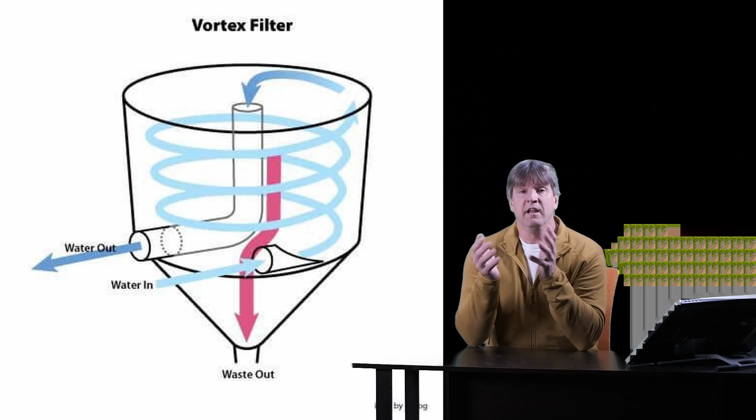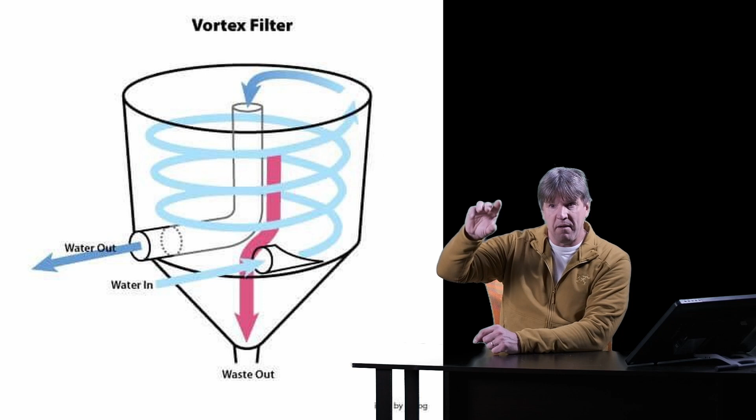So vortex filters basically in concept are very easy. It's basically a round cylindrical tank, okay, with a cone shape preferably on the bottom. And what happens is the water comes in a pipe from the side, okay, about midway up the tank, where the water can come in on the side of the tank and just circulate around like a big whirlpool, okay? As that water circulates around, round and around and around, all the solids will drain out of it to the bottom of the tank.

On the top of the tank, there will be an overflow pipe, which can lead out to, preferably, another filter tank. Whether a mechanical filter, biological filter, whatever we may have set up. We'll talk about all that. So again, concept really easy. Water comes in the side of this cylinder round tank, about midway in the water column. Okay, water comes in, circulates around the tank, solids settle out to the bottom, and then the clean water comes up to the top and overflows out the top pipe.

Okay. So, I first learned about these vortex filters probably almost 30 years ago when I built my first pond for myself. I was really into koi ponds. I was really into bottom drains, and I found out that these vortex filters work great with bottom drains. So I went through all kinds of crazy channels to try to find a vortex filter. Right? So keep in mind, 30 years ago, a lot of this pond industry stuff was all pretty new, and things weren't as readily available as they are today. But I did get my hands on a nice vortex filter.

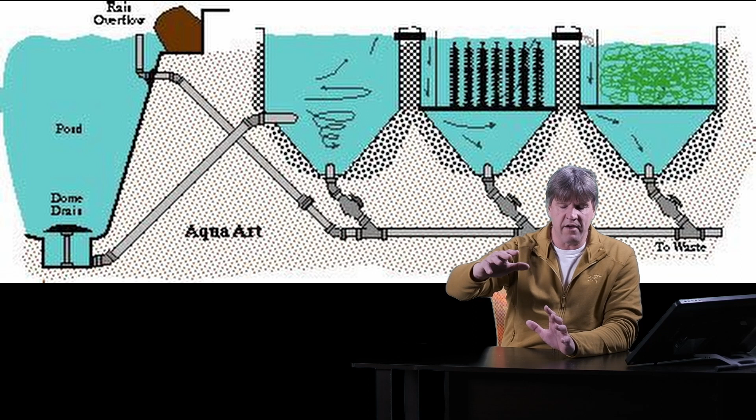Ideally, they should be set up in a bottom drain system, okay? You can set a pump to pump into them, okay? But if you're pumping into them, then your end result, your pipe out of the tank, whether this tank or your filter, whatever kind of filter comes after it, has to be just a gravity-fed pipe back to the pond. It's not going to be pumped back up to a waterfall or anywhere else like that.

So for that reason, gravity feed them in from a bottom drain directly into the side of that vortex tank, fill up the vortex tank, flow out of the vortex into the next chamber, out of that into the next chamber, 2, 3, 4, however many chambers you have, and then a pump pulls it out of the last chamber and pumps it back through UV lights, through a bead filter, through whatever you wish, back to your pond, waterfall, stream, whatever. Like this picture shows back here behind me.

Now, two things that I definitely recommend. One, to have a valve, whether a gate valve or a ball valve, in front of the vortex tank. So as your water comes from the bottom drain, we need a valve there before it gets into your vortex. Reason being, when we want to clean the vortex or clean any of the filter tanks, we need to be able to shut the water off, stop the water flow from the pond into that filter tank.

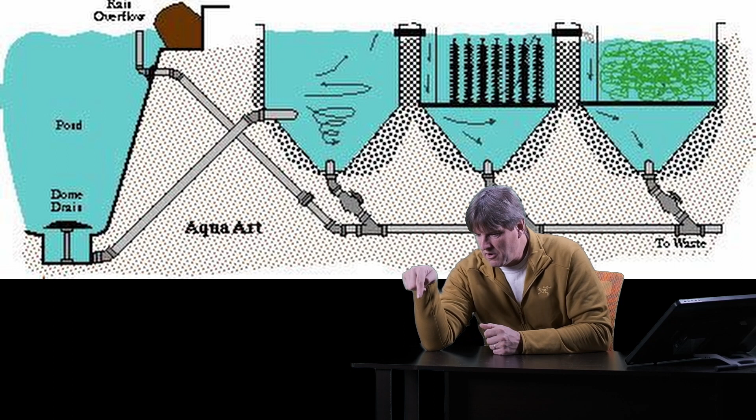However, great in concept, very difficult to achieve in the field. Simply because if we are putting these tanks in the ground, our ball valves are now 3 feet down underground. Okay, so we need to find a way to access that ball valve to be able to open and close it. And secondly, where is all that wastewater going to go if we're 3 feet underground?

All right, we have to be able to drain these tanks in such a way that the water out of the discharge pipe has a free flow out someplace to drain and get rid of all the garbage. Unless your property's on a hill where we can trench out and come down the hill, it's difficult to use these drains in the bottom of the tank.

Now, another option would be to use a sump pump inside: shut the valves off, close the water supply from the pond, put a sump pump in there and suck all the garbage out and suck out all the water. Yeah, that's an option too, okay? Of course, it's much easier if we can just open that valve and let all that water go right out and carry all that sludge and debris and sediment out with it. So that's something you have to figure out on your own, in your own pond, your own property, how we're going to do that.

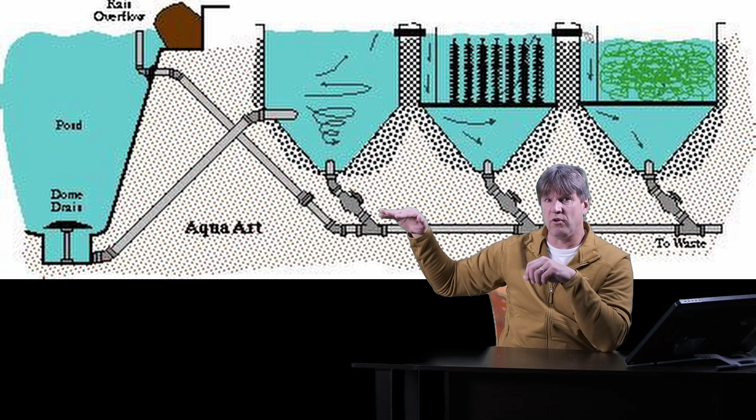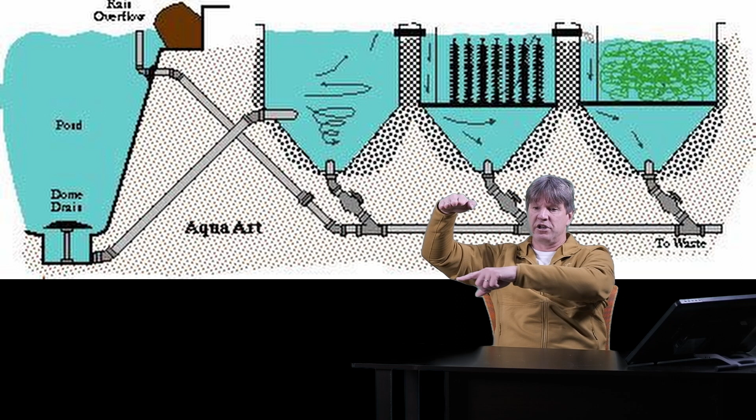Now, these filter tanks ideally need to be set up, especially if it's done with a bottom drain, so that the top of the vortex filter is a couple inches above the water level of your pond. Because you have the water level of your pond, you're going to have a bottom drain, you're going to have your 4-inch pipe, 3-inch pipe, whatever it's going to be. I would recommend 4-inch coming up into that tank, all right? And then that water is going to fill that tank up.

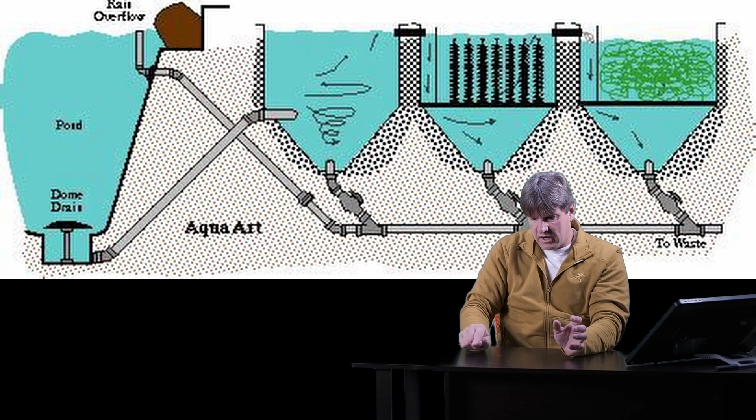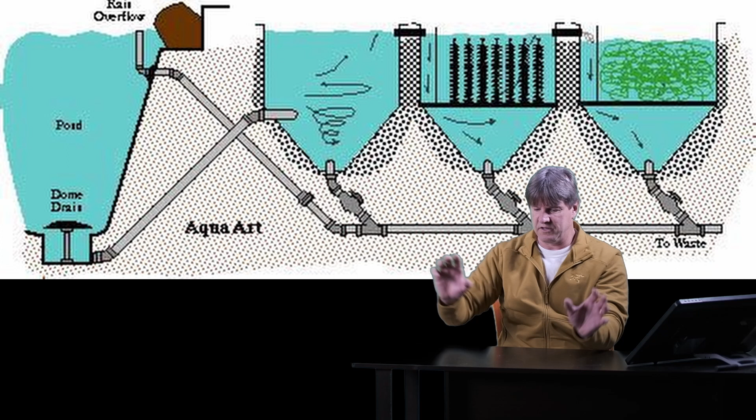So picture it as 2 cups of water with a straw connecting the 2 cups on the bottom, okay? 1 cup of water is your pond, 1 cup is the filter tank, and the straw is the bottom drain and the pipes connecting the 2, okay? If you pour water into your pond cup, the water's going to go into the other cup through the straw, and both cups are going to fill up at the same time, even and level, all right? So 1 cup is your filter tank, 1 cup is your pond.

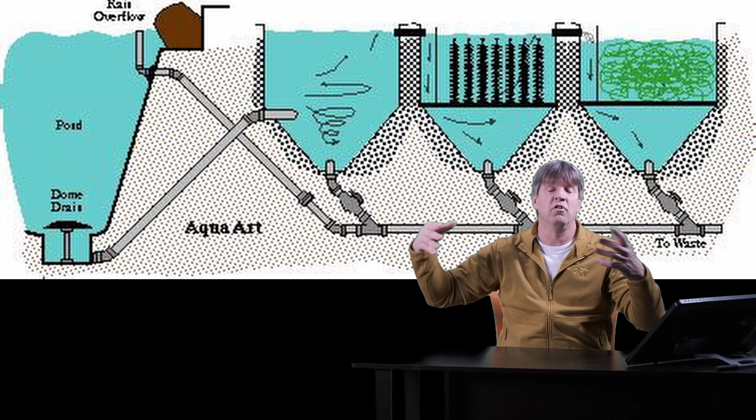We need to make sure that that filter tank is a little bit higher, all right? The top of that tank is just a couple inches higher than the water level in your pond, so it doesn't overflow. Now, here's the trick.

On the top of this filter tank, where we have this overflow pipe, the overflow pipe may be a couple inches from the top of the tank. We need to make sure that the water level in the pond covers that overflow pipe, but yet does not overflow the tank. That's key to setting up these filter tanks.

Reason being, if the water level in our pond should drop, if it should evaporate and drop, what's going to happen is your overflow pipe is here. When the pond's full, the water is going to be able to go through the pipe. If the water level in the pond drops, the water level in the tank is going to drop. If the water level in the tank drops, we don't have a full flow of water through that pipe.

So we may have the ability to bring in, I'm just going to throw a number out, 4,000 gallons an hour through our bottom drain into the vortex. But what's going out of that vortex is maybe 2,500 gallons an hour, because at the bottom where the pipe is coming in, we have a full flooded pipe coming in. Where it's going out, it's not a full flooded pipe. It's only maybe halfway flooded. So the water's just going through.

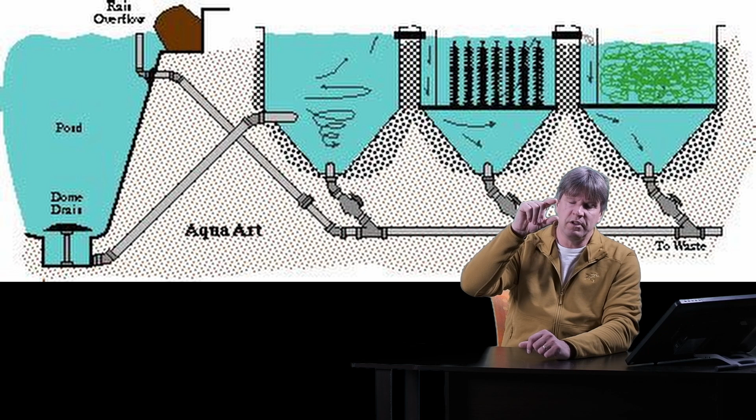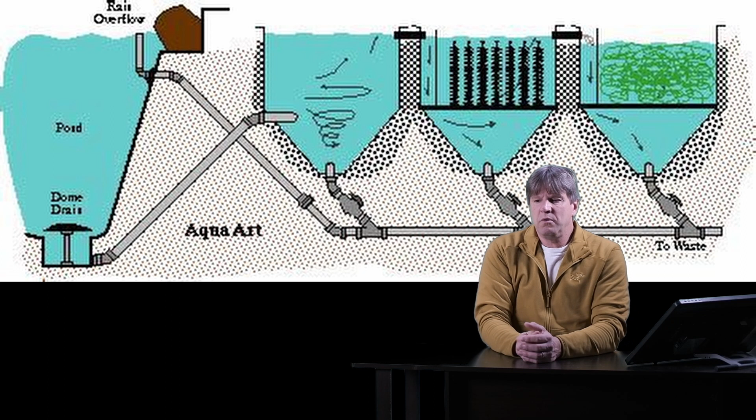But again, the trick is make sure that you have a flooded pipe coming in and a flooded pipe going out. Now, as long as the top of that vortex filter is always an inch or two above the water level in your pond, it will not overflow. All right. Just some things to think about. So, like I said, it's very simple in concept, but can be a little difficult in use sometimes.

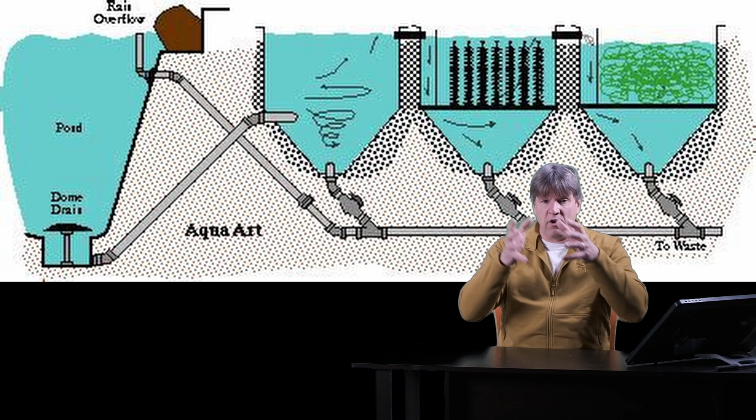Now, sometimes these vortex filters, the tanks themselves, can also be used several of them in a line, with one an open vortex. The next one you could have some filter pads in it, like mechanical filtration, and then maybe finally into another one that has a biological media in it. Each time the water comes out of your main vortex tank and goes into the top of the next tank, a lot of these tanks have a baffle in them.

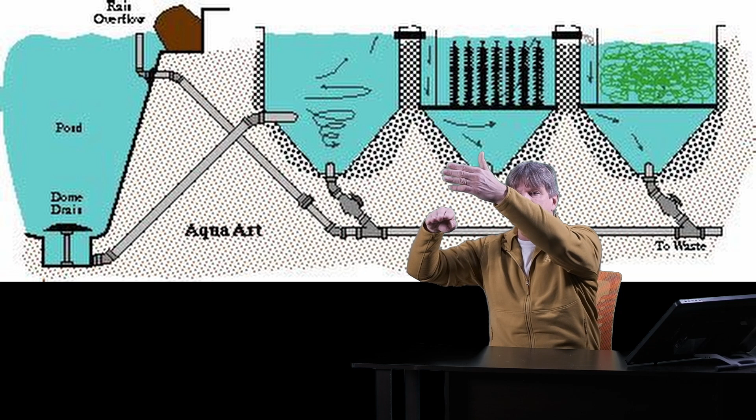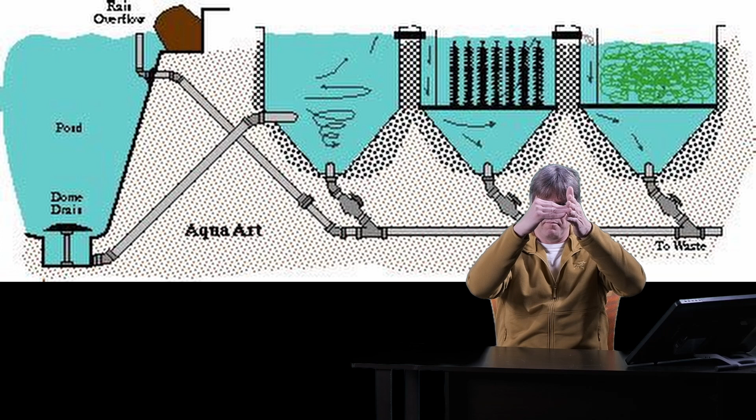So the water comes into the tank, then there's a baffle that comes down, it goes halfway down to the bottom. And the purpose of that is to have the water come in, hit that baffle, and be forced down to the bottom and then come up through all the filter media. Then flow out the tank on the other side. And then your final tank, it could come in the top, flow down, and have a pump pull it out of the bottom. Different ways to configure it.

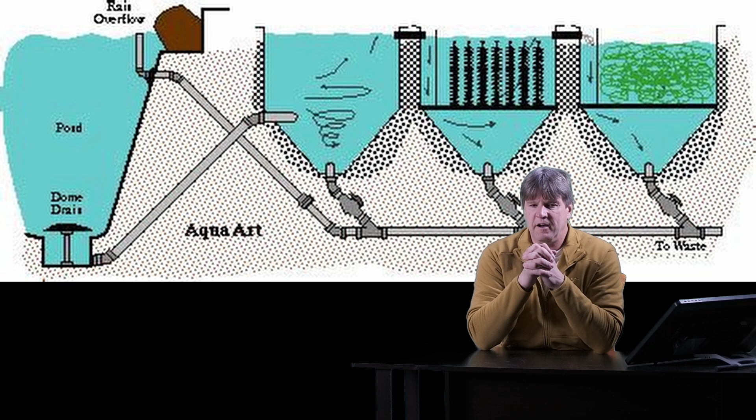I hope I'm not losing you. I'm trying here to explain things. I should really be trying to draw this stuff for you, but it's really difficult. So yeah, some different things to think about.

Now, all those filter tanks, if you're using a series of these, they all have to be perfectly level, and the idea is your larger settlement first tank, your vortex tank, will clean out all the larger, heavier debris, come out of that tank, go into the next one, which will be a finer filtration, and then go into the last one, which can be biological.

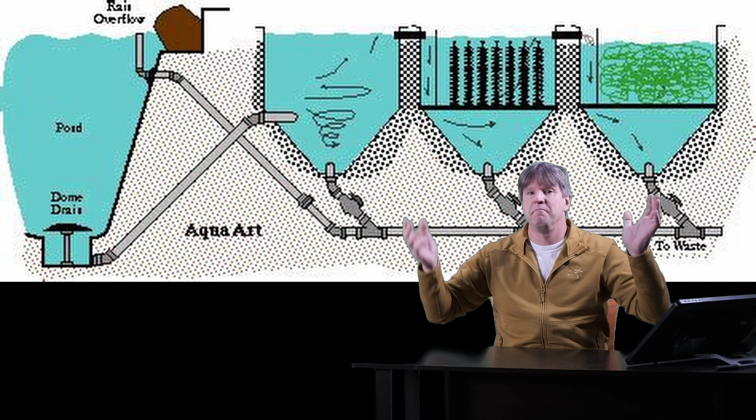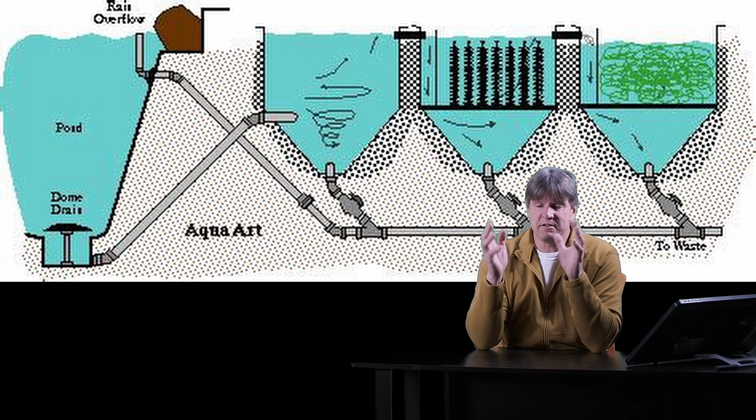Now, like I said, it all depends on your system. You could have a vortex tank with one tank after it. You could have a vortex tank with 4 tanks after it, 5 tanks after it. Hey, more power to you. Like I always say, you can never overfilter. So, if you have the room and the wayabouts to do it, do it.

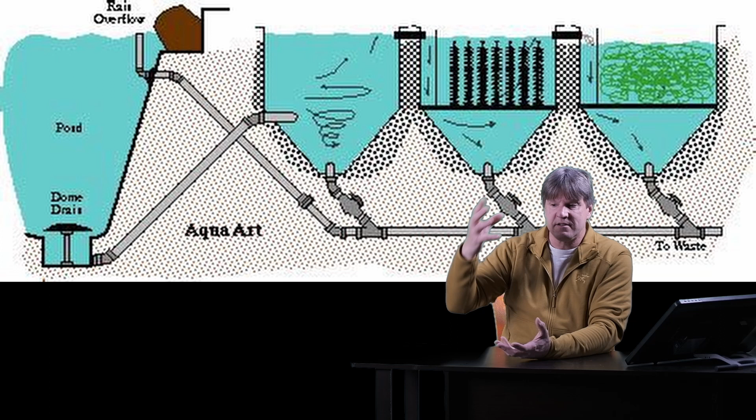Now, herein lies the problem. As I said, we cannot pump a ton of water or gravity feed a ton of water really fast through these tanks. The faster they go, the less they settle out. So sometimes, in order to supply our pumps with enough water at the end, we may need 2 or 3 separate vortex tanks to bring in enough water for the pump at the other end.

I don't have exact numbers with me, there's so many different size tanks, okay? So how much water we can pump through a given vortex tank is dependent on the size of the vortex filter, all right? The one I had was probably close to 3 feet round. I've seen them a little bit narrower, maybe 2.5 feet round. And I've seen them a good 4 feet, maybe more, 4.5 feet round.

I had a client that had a big one, a big 4.5 foot round tank. It had two 4-inch pipes coming in on one side from the pond, and the outflow was a 6-inch pipe. My old one, I believe, was a 3-inch in and a 3-inch out. So again, there's different ways to do it.

But as I'm saying, through a smaller tank, sometimes we can't pump the amount of water that we need to adequately filter the size pond that we have through just one vortex tank, okay? We may need 2 or 3, and then from there, those 2 or 3 go into separate filters, and then one pump can pull them out of there. Depends on your setup, depends on how everything is put together.